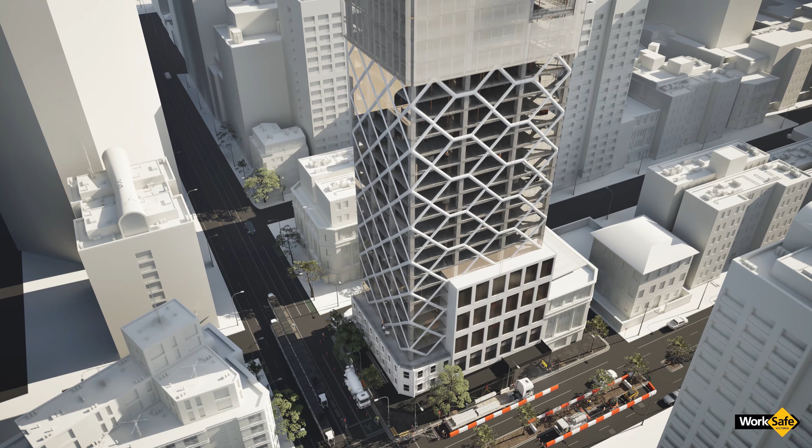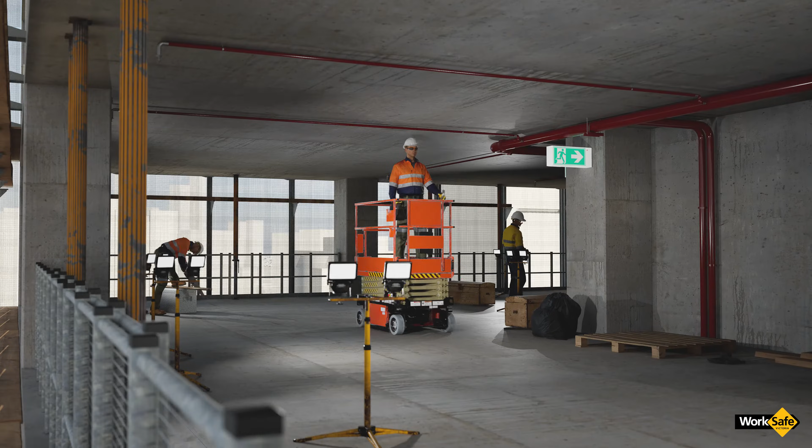In 2020, the construction of a 48-storey high-rise apartment building was underway. The principal contractor engaged a subcontractor to install fire protection sprinkler systems for the building. On the day of the incident, workers started the installation of the fire protection sprinkler system on level 26.

One worker positioned himself on a scissor lift within 2 metres from the edge of the building to install the sprinkler system on the ceiling. The edge was protected by guard railing approximately 1 metre in height, covered with metal mesh. Perimeter screens were also installed. However, there was a gap of approximately 600 millimetres between the perimeter screen deck and the edge of the building.

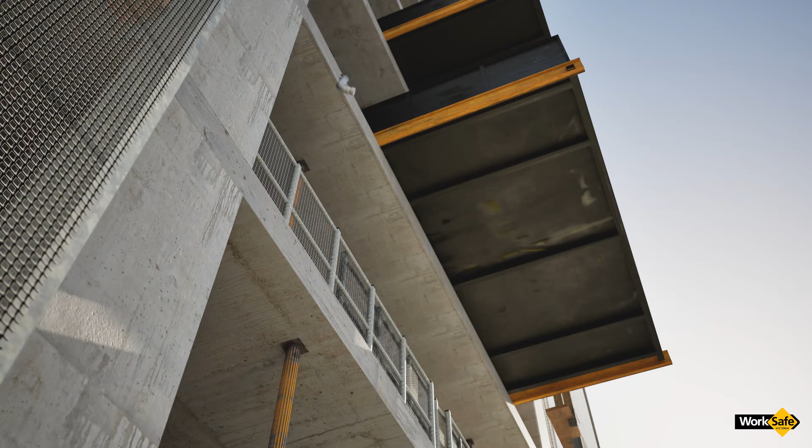The worker was installing a steel sprinkler head weighing 400 grams. The worker lost control of the sprinkler head. It fell through the gap between the perimeter screen deck and the edge of the building. It fell approximately 93 metres, striking a truck belonging to civil infrastructure workers. No workers or members of the public were injured.

Using the WorkSafe dropped object calculator, the impact of the sprinkler head falling that distance is the same as being hit by a car on the street.

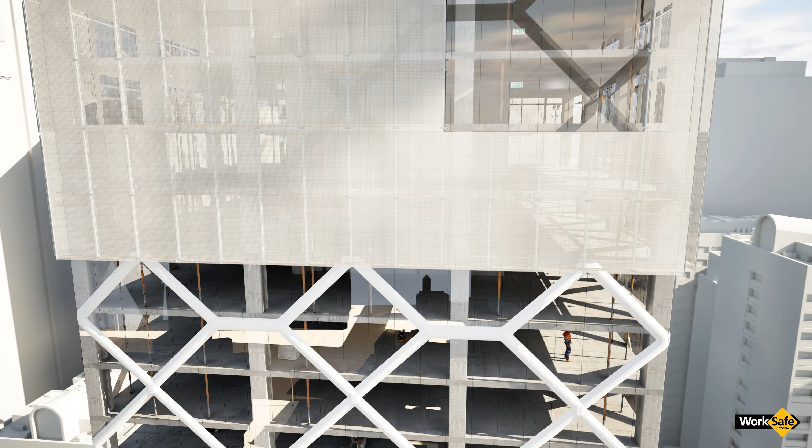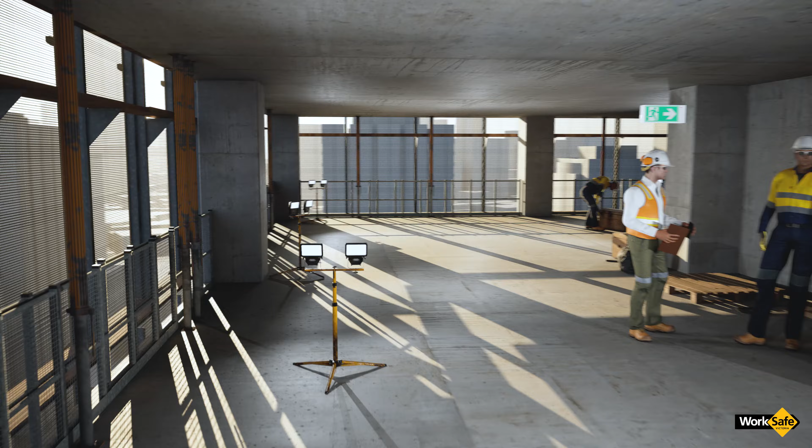Delays in facade panel manufacture meant the facade could not be installed behind the perimeter screens, leaving levels 22 to 25 exposed. To combat this change, the principal contractor organised for the installation of guardrail and vertical debris nets. 1 week prior to the incident, formwork on level 26 was completed. The principal contractor's supervisor signed a handover stating vertical debris nets or perimeter screens were in place with no gaps, rendering it open to other trades.

On the day of the incident, there was a gap of approximately 600 millimetres between the perimeter screen deck and the edge of the building. The vertical debris nets had not been installed. The principal contractor's site induction did not include information that work should not commence on levels where vertical debris nets or perimeter screens were not installed.

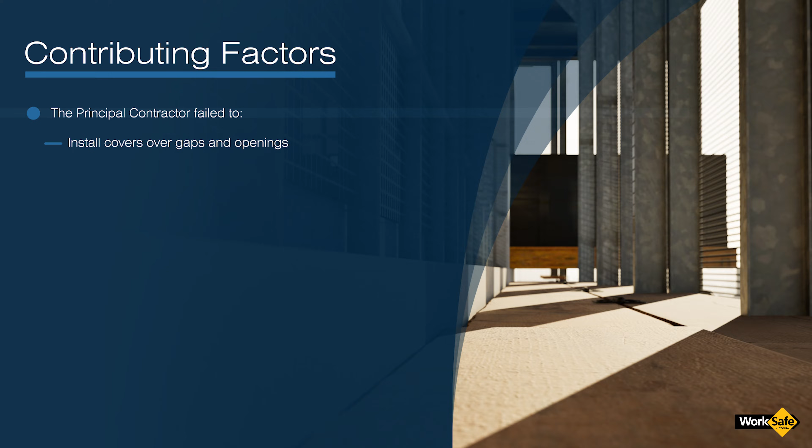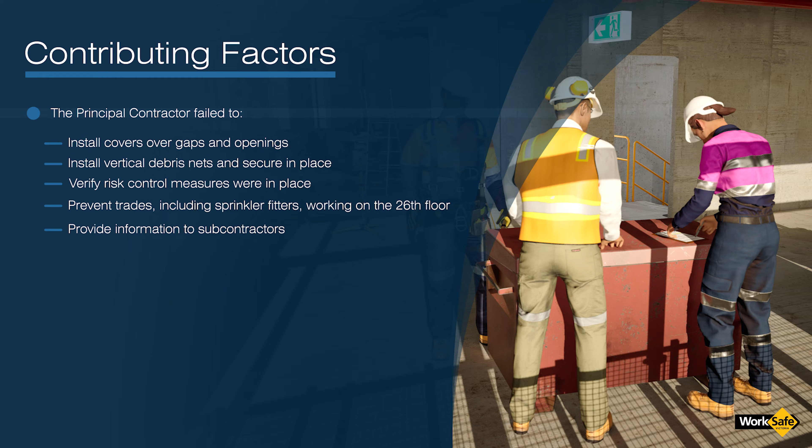An investigation into the incident identified the principal contractor failed to install covers over gaps and openings between the perimeter screen and building edges, install vertical debris nets to the perimeter of the building on level 26, verify risk control measures were in place prior to floor handover to the services trades, prevent trades, including sprinkler fitters, working on the 26th floor until the vertical debris nets were installed, and provide information to subcontractors to ensure work did not commence on levels where vertical debris netting or perimeter screens were not installed.

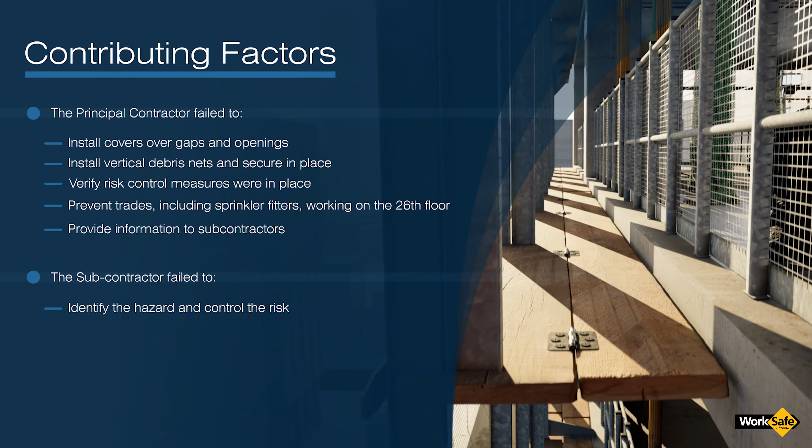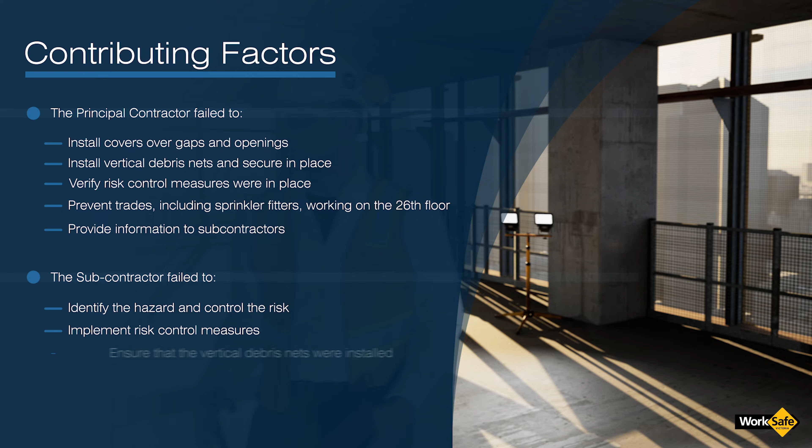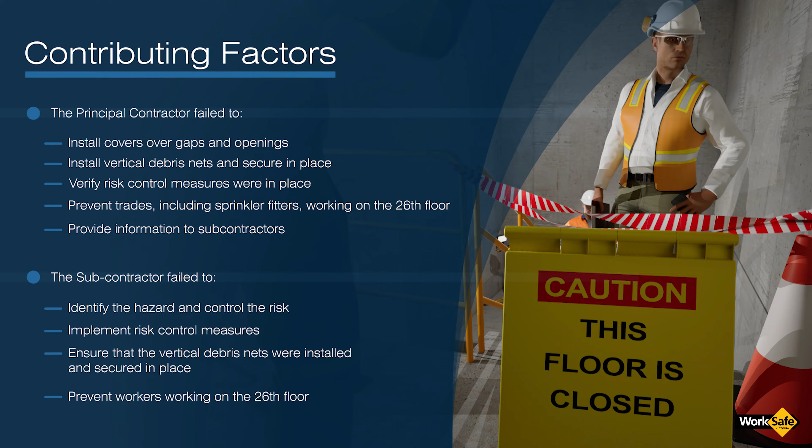The subcontractor failed to identify the hazard and control the risk of falling objects before commencing work, implement risk control measures such as using lanyards to prevent equipment from falling, ensure vertical debris nets were installed and gaps and openings between the perimeter screen and building edges were covered before starting work, prevent workers working on the 26th floor until adequate controls were installed, and provide information, instruction and training to workers about the risks of falling objects when working at heights.

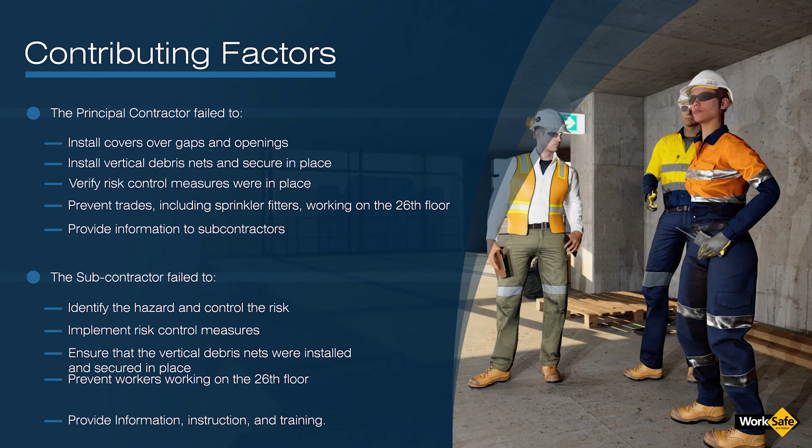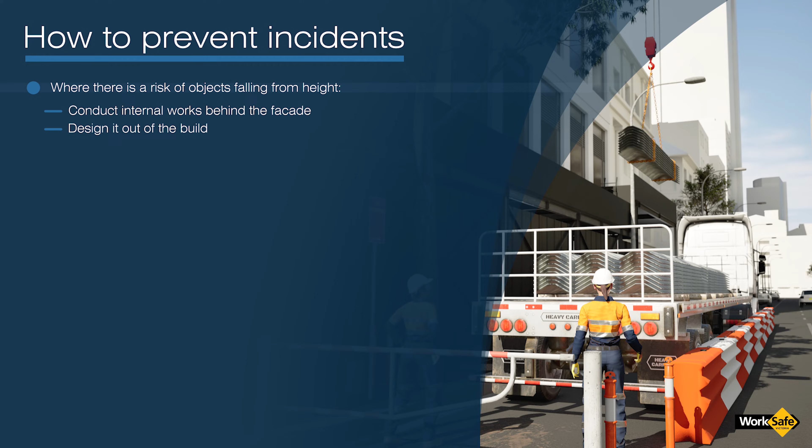Falling objects can pose a serious risk to both workers and members of the public. Where there is a risk of objects falling from height, eliminate the risk, such as conduct internal works behind the facade, design it out of the build, for example, off-site assembly or fabrication to eliminate activities that would otherwise be performed at height.

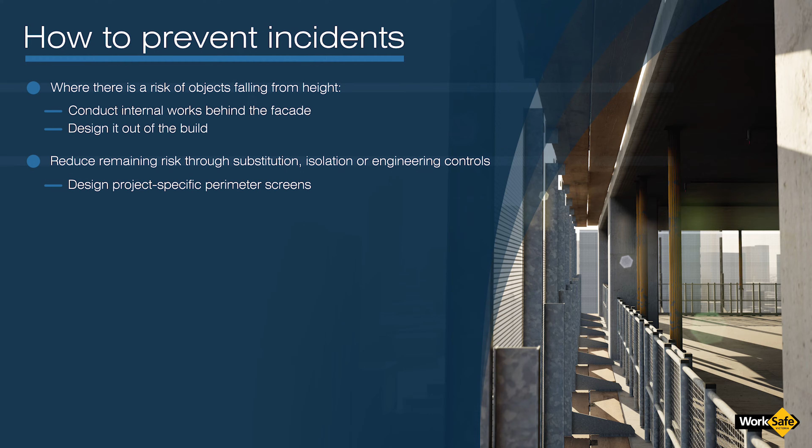Reduce remaining risk through substitution, isolation or engineering controls, such as design project-specific perimeter screens to encapsulate the building, ensuring the bottom deck closes the gap around the perimeter of the building. This can be achieved by the installation of hinged timber flaps.

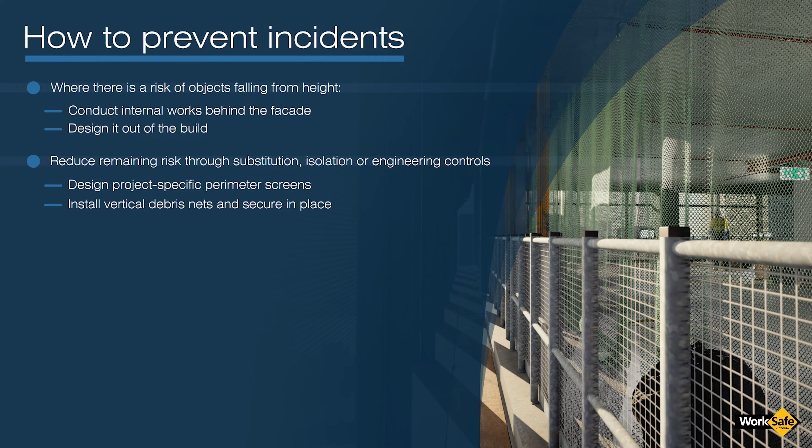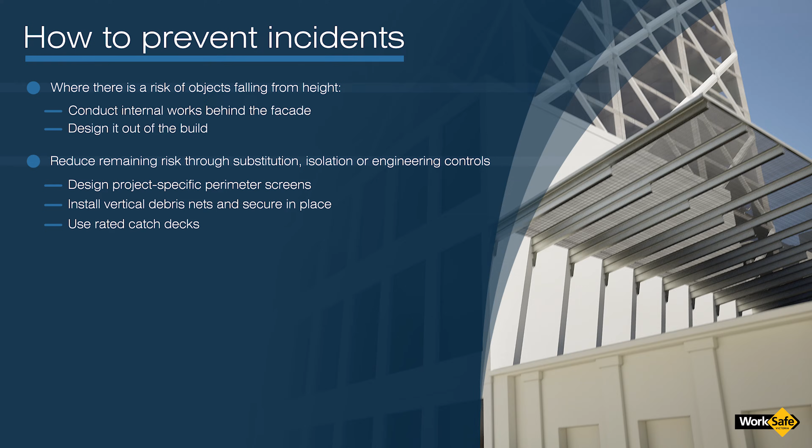Install vertical debris nets, curtain systems, guardrail systems or scaffolding to contain materials around the perimeter of the building to infill any gaps and around edges of internal voids and penetrations. Use rated catch decks for capturing falling objects. Erect overhead protection such as gantries or scaffolds.

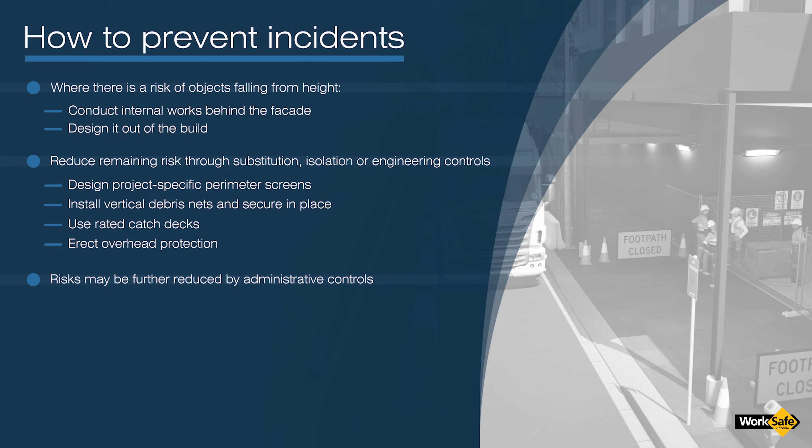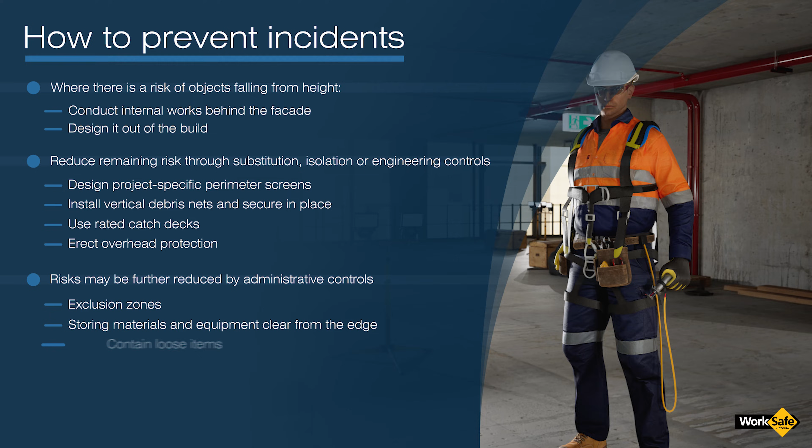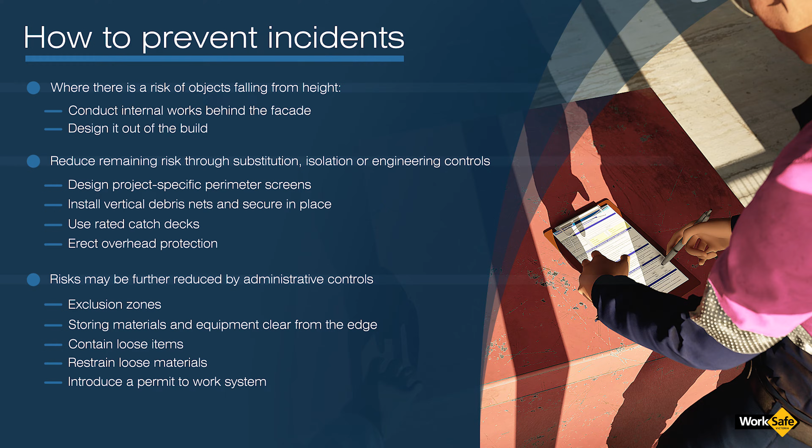Risks may be further reduced by administrative controls, such as implementing exclusion zones at ground level, storing materials and equipment clear from the edge of the building and internal voids and penetrations. Contain loose items with lanyards, belts and pouches. Restrain loose materials with ropes, ratchet straps or adequate weights. Introduce a permit to work system. Monitor weather conditions such as high winds. Provide information, instruction and training to employees.

Construction workplaces are dynamic and constantly changing environments. If changes to the original work plan or process are needed, ensure the risk controls are reviewed and, if necessary, revised. To help you understand your obligations, guidance material is available on the WorkSafe website www.worksafe.vic.gov.au/fallingobjects.